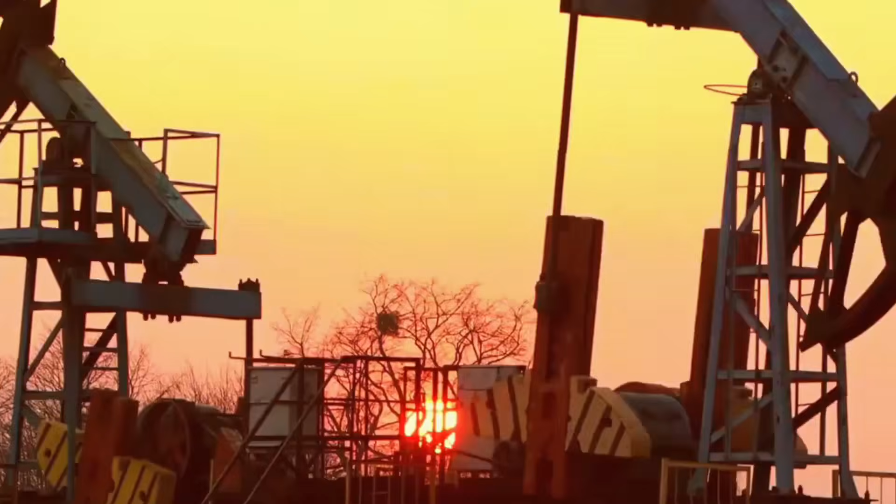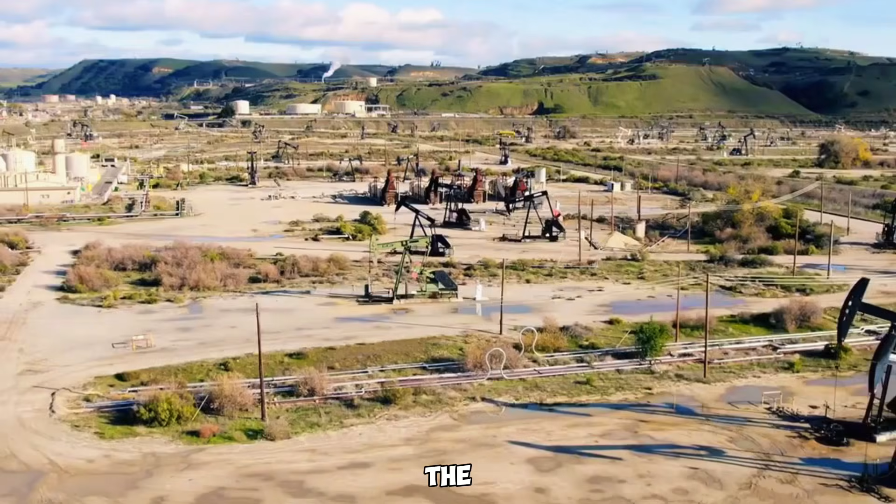In the vast canvas of human civilization, oil is a force that has profoundly shaped the modern era. It is not just fuel, it is the lifeblood of commerce, industry, and global connectivity. More than 100 million barrels of oil are extracted and transported every day, the real driving force behind our dynamic world. This resource, built over millions of years, rises from deep underground and is broken down in refineries to become gasoline, diesel, and other components. Every drop of oil provides the foundation for power, light, and development.

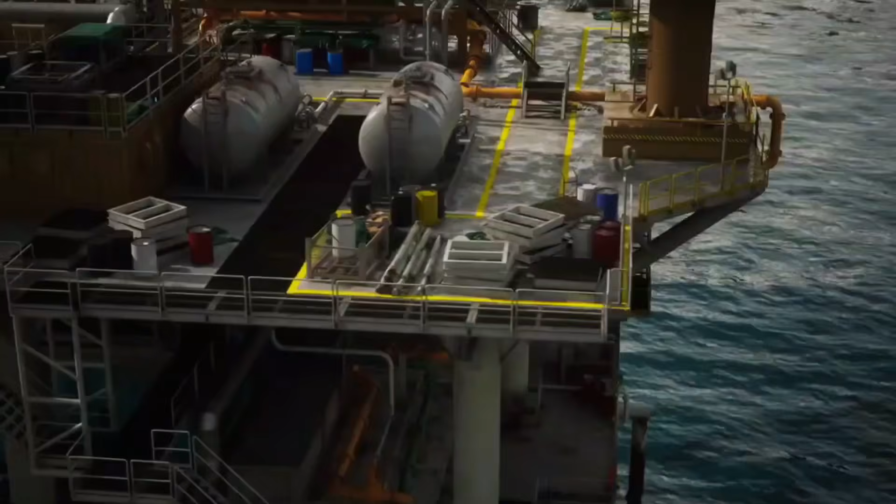But behind this seemingly ordinary resource lies a remarkable story. Let's find out. Crude oil, the lifeblood of modern civilization. It's called drill baby drill, drill baby drill, the familiar slogan whenever America's need to pump more oil to keep its economy stable comes up.

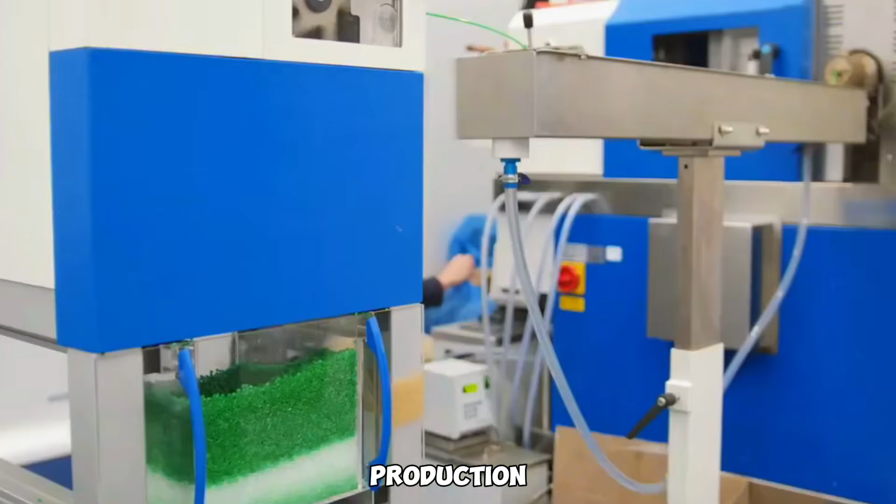Indeed, for decades, oil has been regarded as the lifeblood of the modern world. It doesn't just power cars, airplanes, and ships. It seeps into electricity production, plastics, chemicals, and thousands of other industries. A minor fluctuation in oil prices can unleash a chain reaction. Transportation costs surge, goods become more expensive, inflation rises, and the daily lives of millions of families are directly affected.

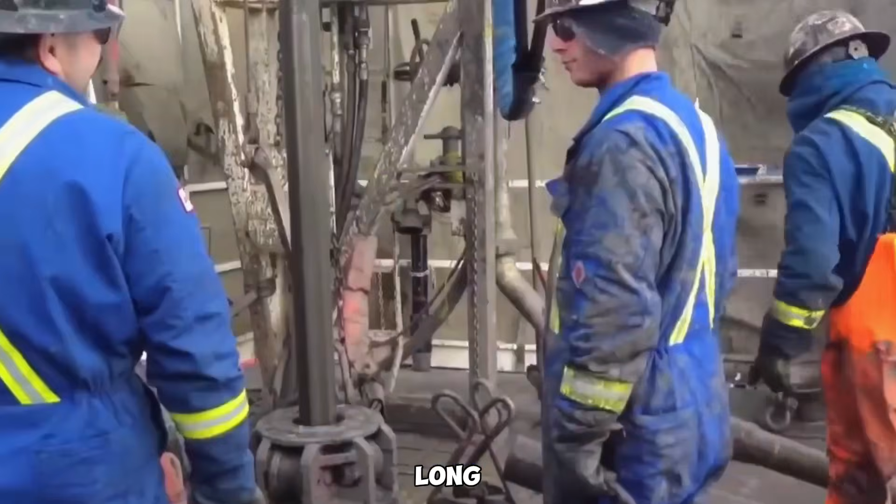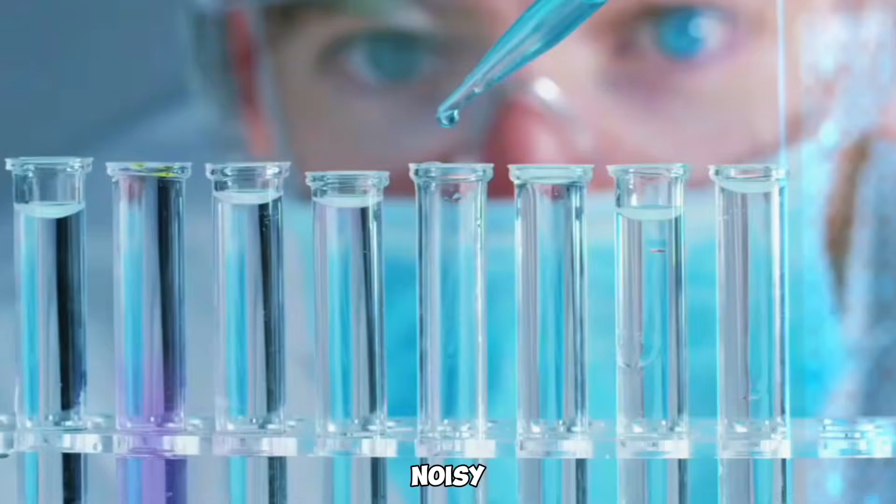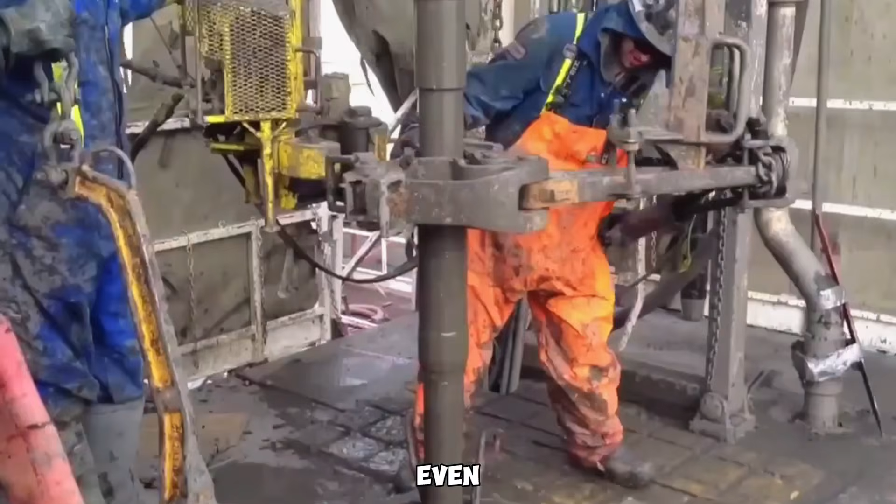And to sustain this colossal resource, workers must spend long shifts on offshore rigs or deep underground. The oil industry is known for salaries that can surpass $100,000 a year. But in exchange, workers endure 12 to 13-hour shifts in noisy environments, weeks away from their families, and the ever-present risk of explosions or fatal accidents. It is a profession both enticing and unforgiving, where sweat, strength, and even safety are traded so that the flow of energy never stops, keeping the world in motion.

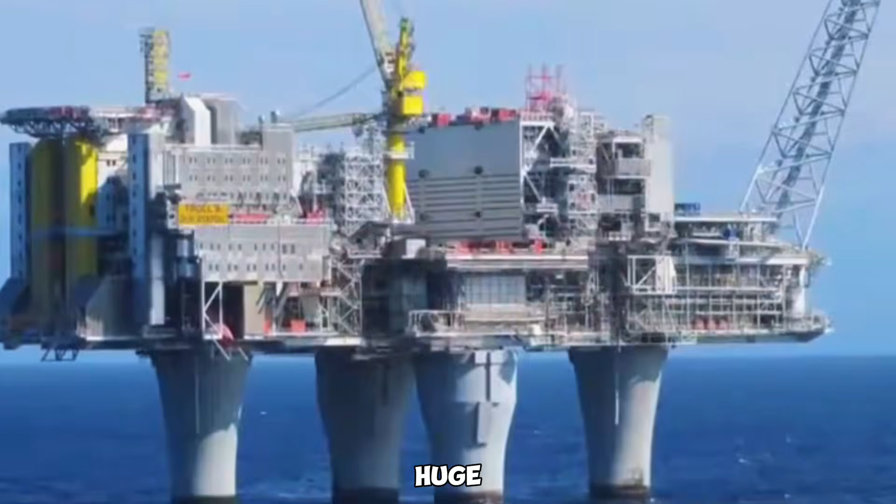Beneath the Earth's crust, hidden in sedimentary layers that are millions of years old, lie vast reserves of oil and gas, one of the main sources of energy for modern civilization. But most of these resources are not directly beneath our feet. They are hidden on the ocean floor, thousands of meters deep. To extract these resources, humans have had to build huge offshore drilling rigs, like a small city built in the middle of the ocean. The project begins on land, where steel structures weighing thousands of tons are manufactured in large shipyards. They are then transported to the sea by specialized ships and placed in specific locations.

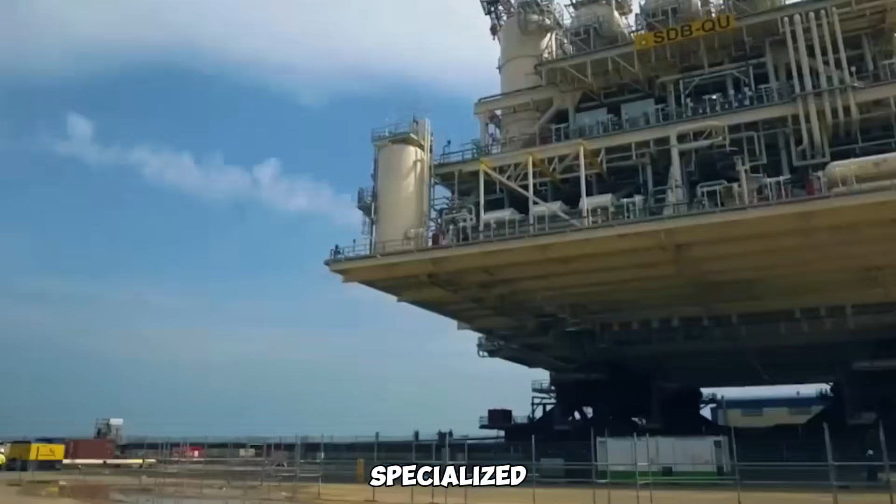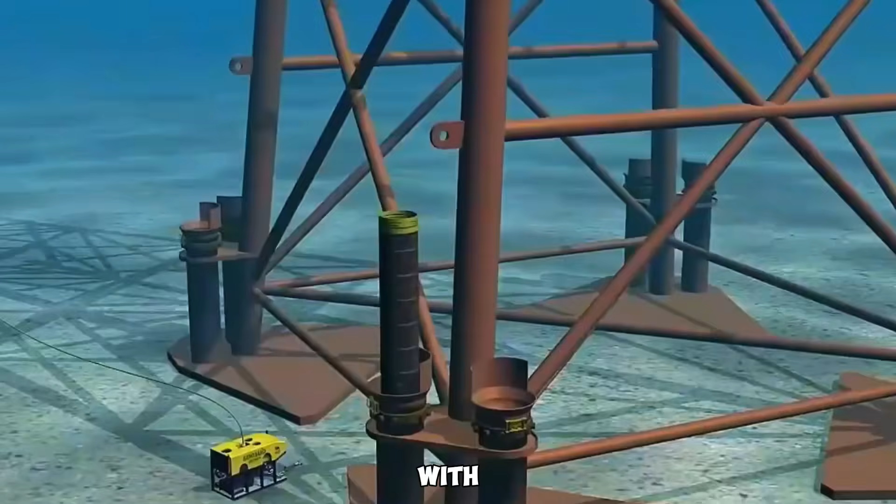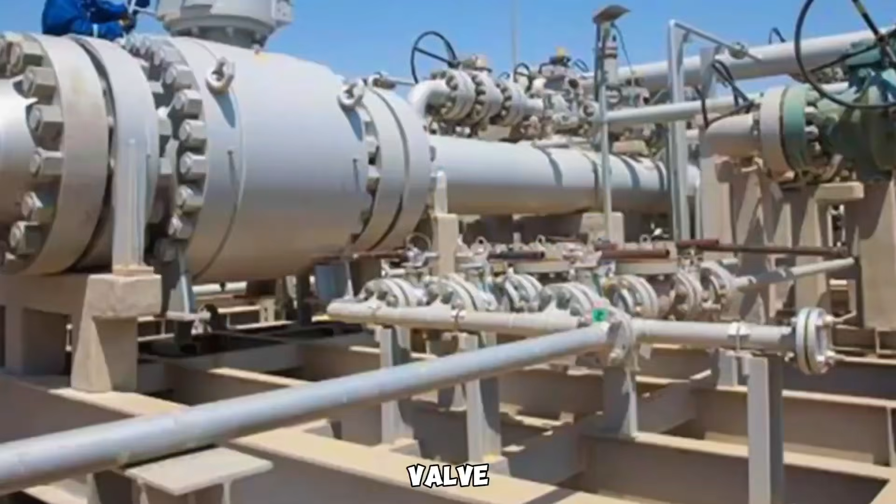In shallow water, at depths of 200 to 400 feet, fixed platforms are installed, the legs of which are driven deep into the seabed and reinforced with concrete. In deeper water, where the depth is several thousand meters, semi-submersible rigs are used. They are balanced by huge underwater pontoons and long anchor chains. A subsea wellhead, which acts like a powerful valve and is capable of withstanding extremely high pressures, is installed on the seabed. These delicate tasks are performed by ROVs, or remotely operated vehicles, which can operate perfectly in the darkness of the deep sea.

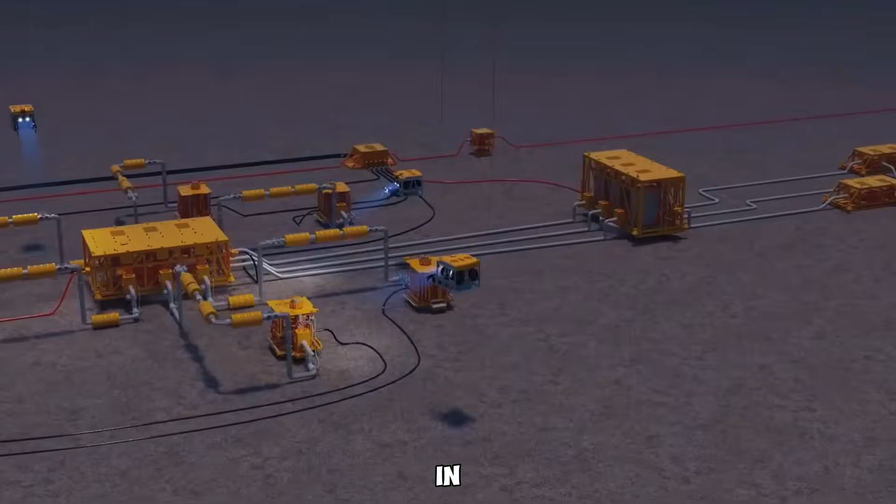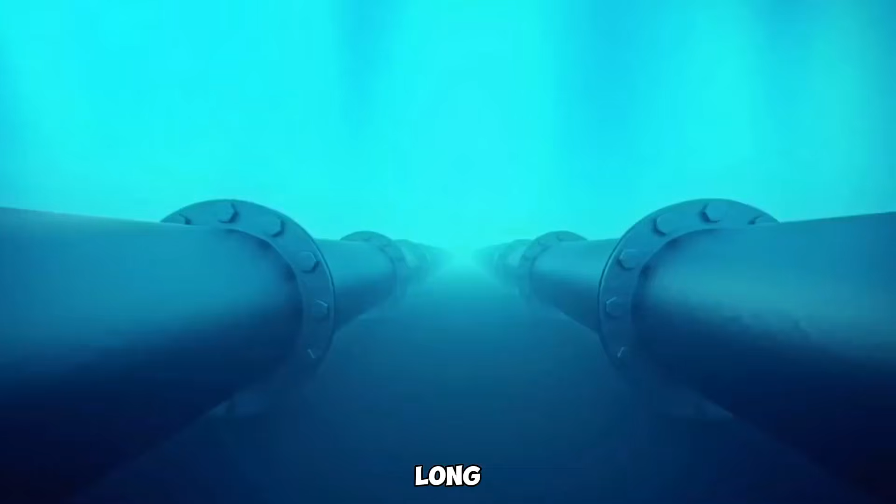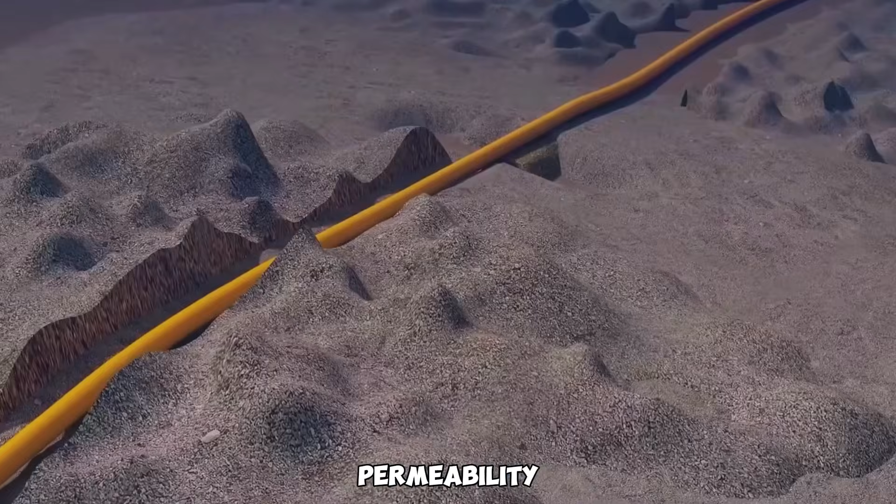Deep sea oil and gas exploration begins with survey ships, where engineers create seismic maps by sending sound waves into the water. Once potential reserves are identified from this map, a drilling rig is deployed. A long steel pipe is used to make a drill string that reaches down through the seafloor, and a solid drill bit continues to cut through the rock. Later, logging tools are lowered to collect information about the rock's interior, such as porosity, permeability, and pressure. This data determines whether the project will be successful.

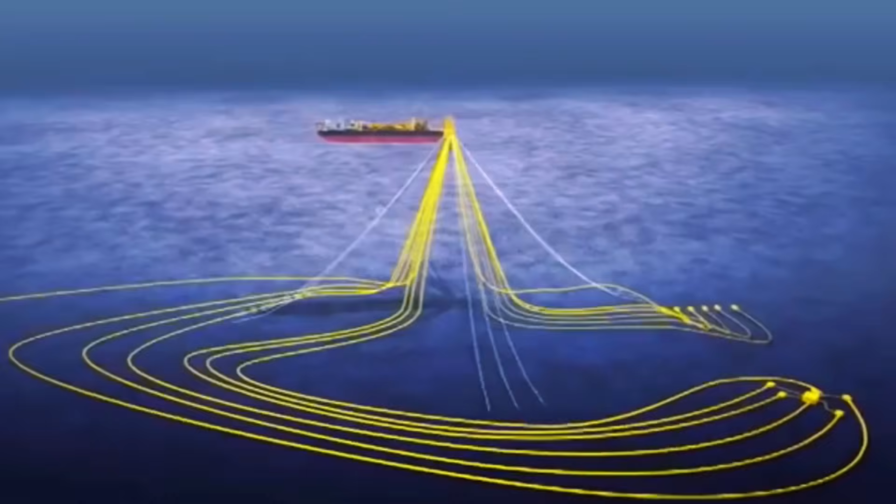However, even the slightest mistake can cause a blowout, which can cause a devastating environmental disaster. So it is important to control each step very carefully. After reaching the reservoir, the well is reinforced with steel casing and cement, and a blowout preventer, BOP, is installed on the seabed, which controls high pressure and prevents accidents. Initially, oil and gas rise to the surface under natural pressure. Later, ESP, or gas lift, is used.

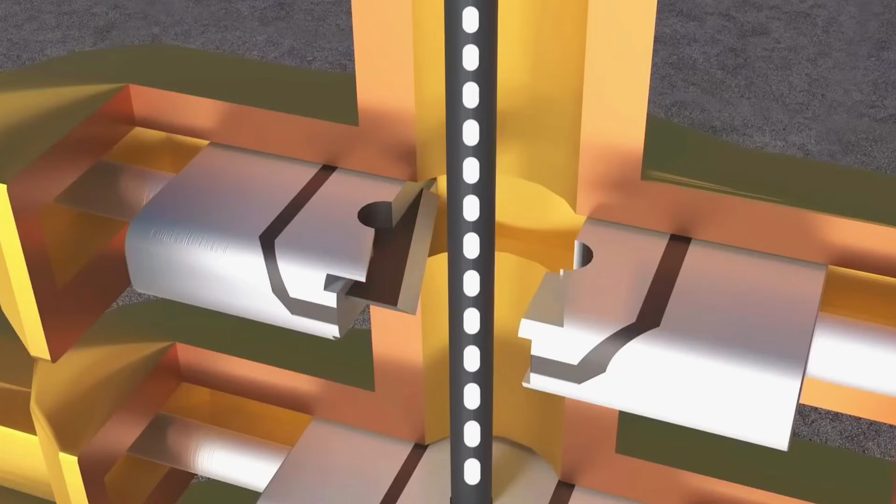The mixture that rises to the surface contains oil, gas, water, and sand, which is separated by a separator. The gas is stored or re-injected. The water is treated and returned to the sea. Sensors monitor it all the time and automatically shut down if there is a problem. Finally, the oil reaches the refinery through a pipeline or tanker and is used in people's daily lives.

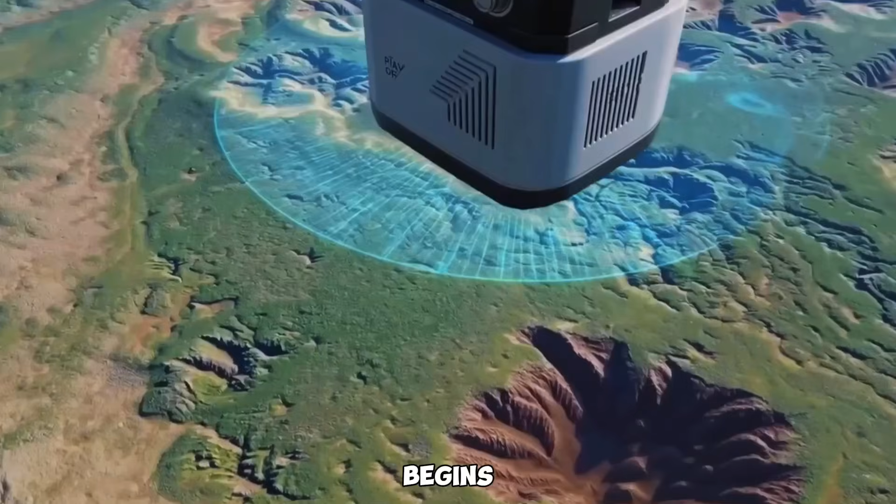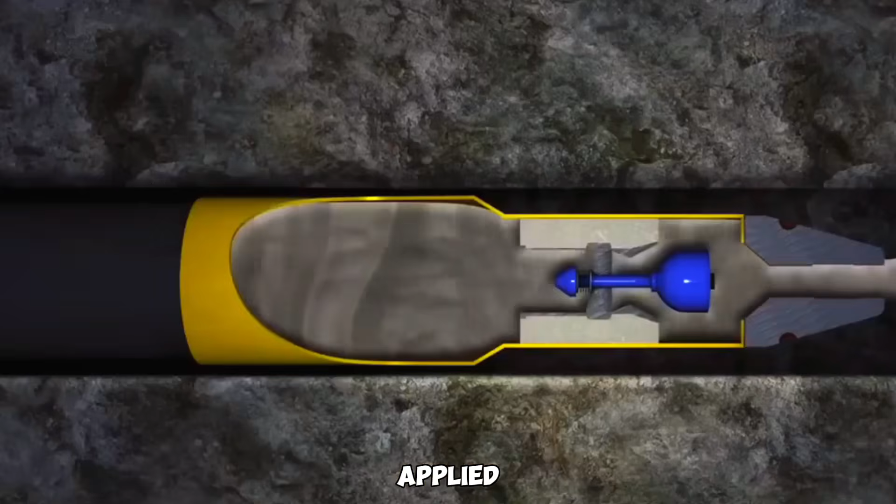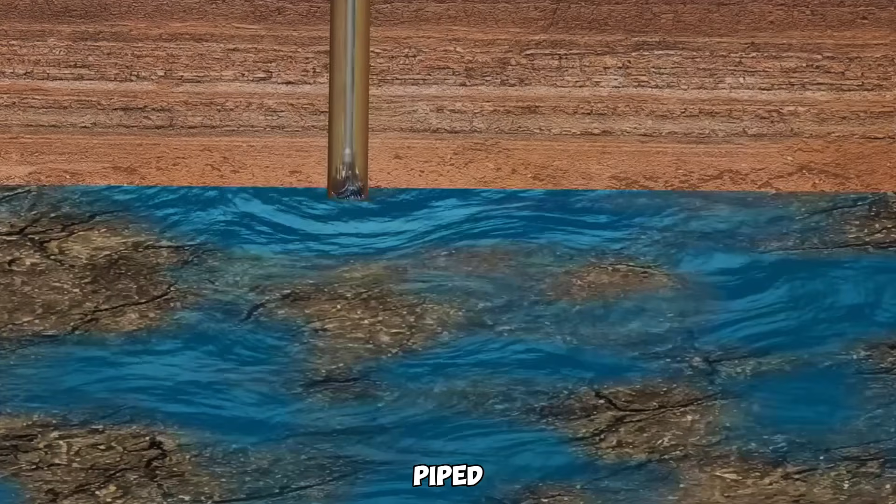Onshore oil production, led globally by the United States, is more complex than offshore drilling. It begins with seismic surveys, exploratory drilling, and rock analysis to locate shale formations rich in oil and gas. Instead of drilling straight down, engineers use horizontal drilling, extending wells thousands of meters to maximize reservoir contact. To release trapped hydrocarbons, hydraulic fracturing is applied, pumping high-pressure fluid to create fractures in the rock. The extracted mixture of oil, gas, water, and sediments is then separated on site, oil stored, gas piped, and water treated, making the entire process highly efficient yet technically demanding.

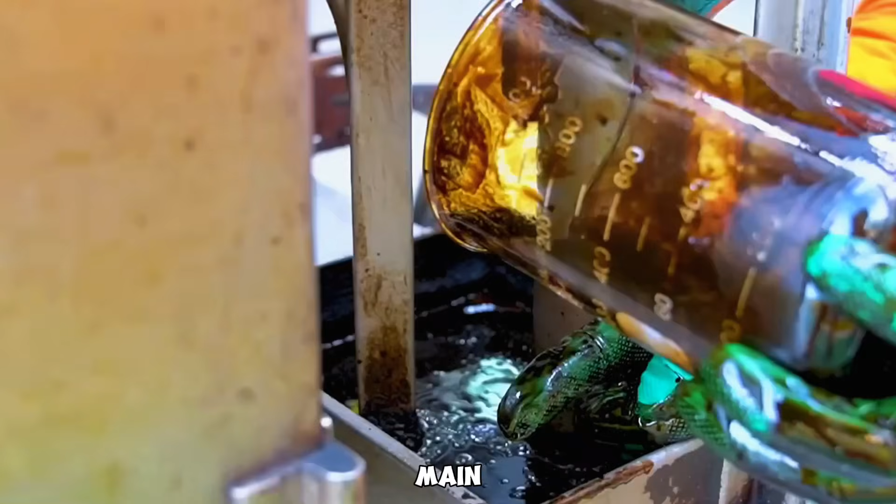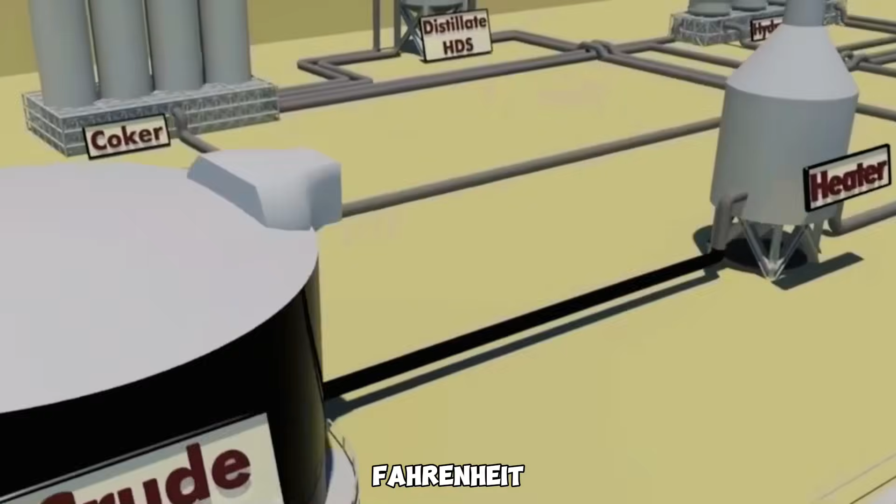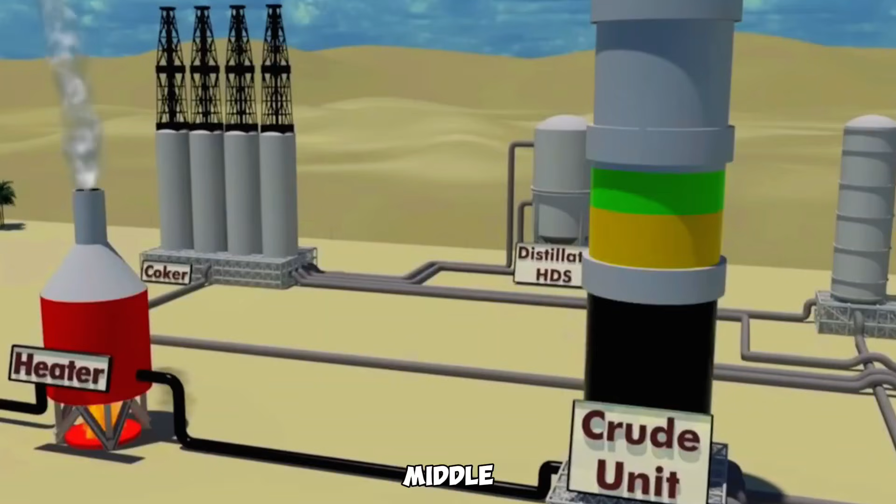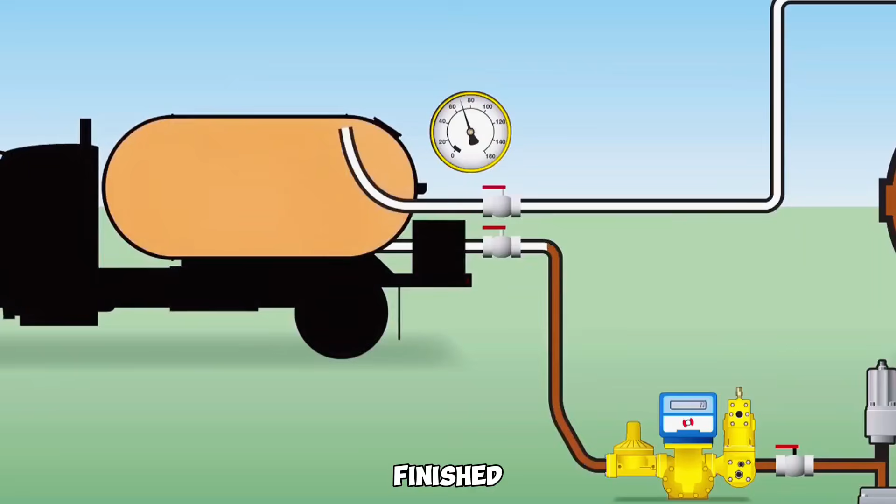After reaching the refinery, the main step in converting crude oil into gasoline is fractional distillation. First, the oil is heated to about 650 to 670 degrees Fahrenheit to vaporize and sent to a tall column. There, the hydrocarbons are separated into different layers depending on the temperature: heavy oil at the bottom, diesel and kerosene in the middle, and gasoline at the top. However, this gasoline is not directly usable. Later, its quality is improved through catalytic cracking, reforming, and blending. Finally, the finished fuel is stored in large tanks, which are completely ready for use in vehicles.

From deep-sea exploration to drilling for oil through underground rock, the entire journey is a unique example of human innovation and technology. From giant offshore rigs to modern refineries, each step keeps our civilization moving. But the big question ahead: will oil still be the world's dominant energy source, or will renewable energy usher in a new era? Only time will tell which way the future will go.